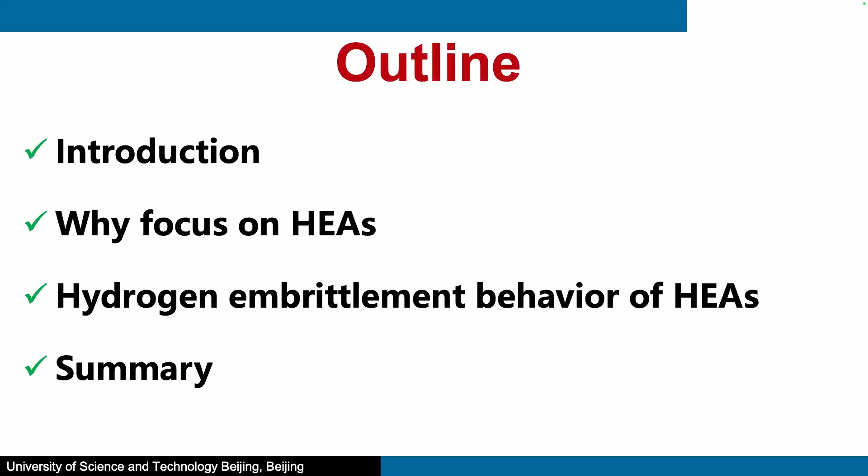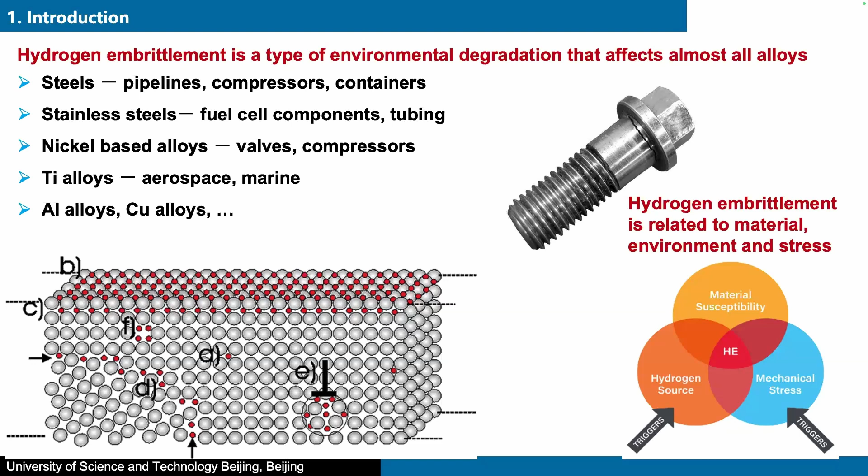As we all know, hydrogen embrittlement is a type of environmental degradation which can affect almost all alloys, such as steels, stainless steels, nickel-based alloys, and all types of alloys can suffer from hydrogen embrittlement.

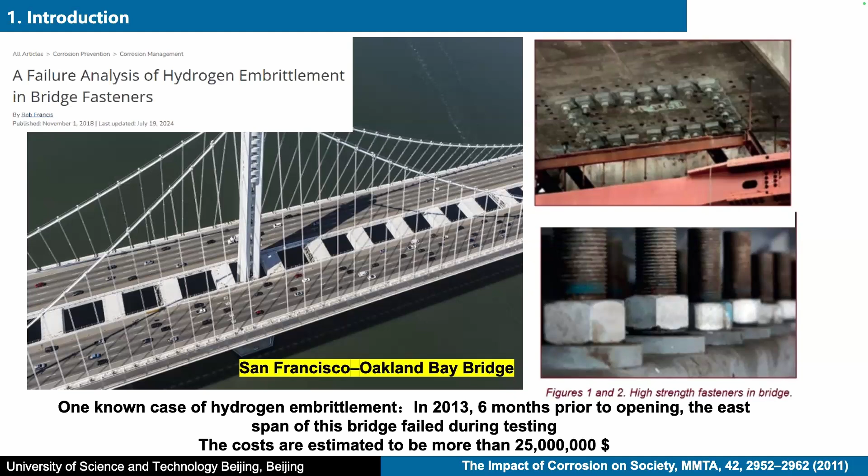This is one very well-known case of hydrogen embrittlement: the San Francisco Oakland Bay Bridge. We did some testing and found high strength fasteners suffer from hydrogen embrittlement, and it also caused a lot of economic losses.

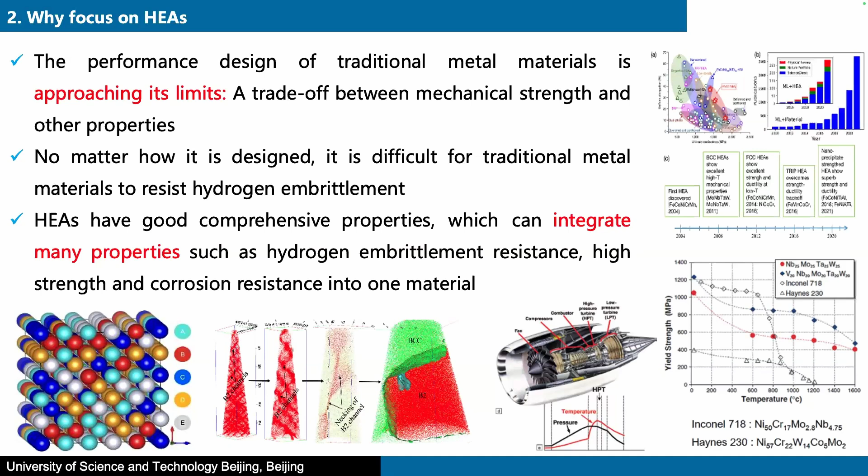So we come to high entropy alloys, because we have many reports about high entropy alloys. They have very good comprehensive properties such as hydrogen embrittlement resistance, high strength, and corrosion resistance. They can integrate many properties together. There are many cases in published work, so we come to this one.

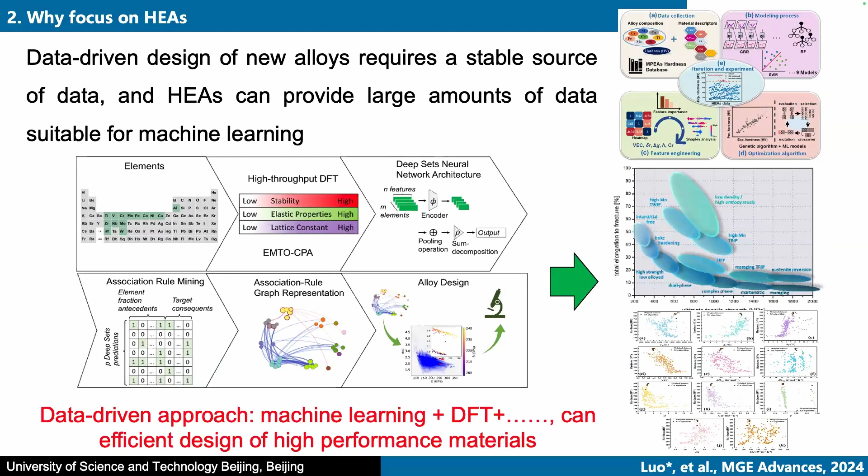Then we can do some machine learning, and also use them to do some DFT calculations, and many calculations can design new high performance materials. There are also many reports, and also come to the next steps.

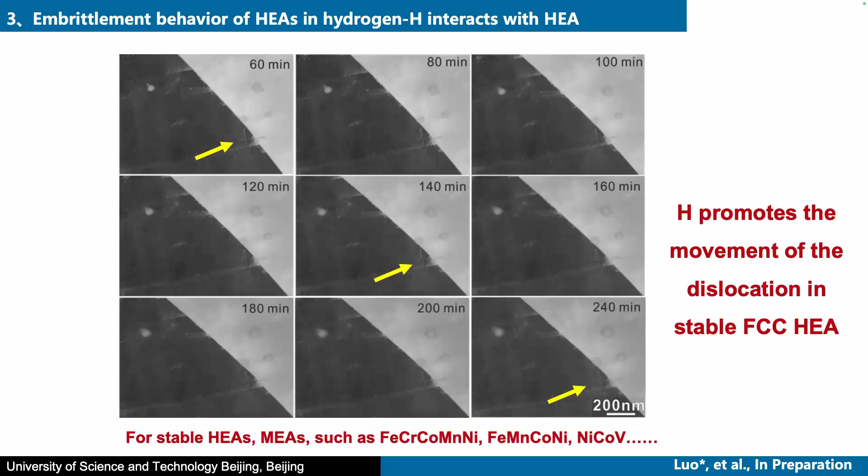If hydrogen just comes into the surface of the high entropy alloys, what can happen? Let's see. There are stable high entropy alloys, of which there are many types. If we charge them with hydrogen and leave them for different times, we found the dislocation can only move from this side to that side, and no other phenomena can be observed.

But if we did similar work observing unstable high entropy alloys, take this for example: it contains two phases, FCC plus HCP. We charged it with hydrogen and observed the similar experiment.

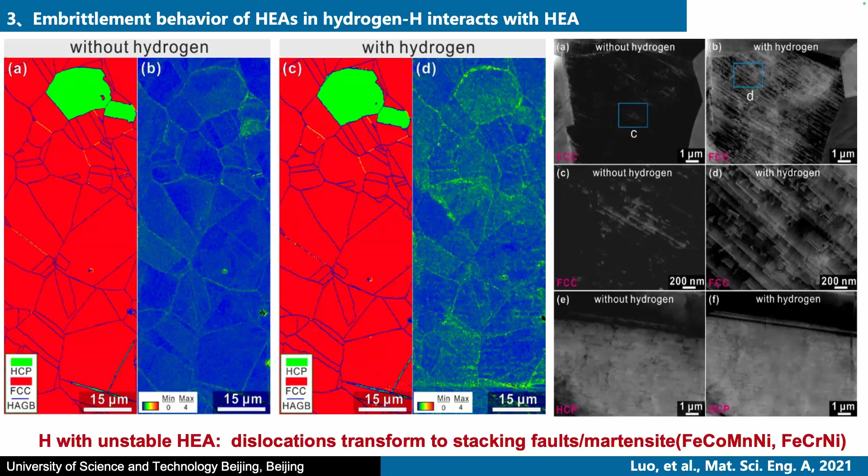We found that for the stable FCC, the free dislocation can transform to martensite at a very small size. But for the HCP, only the dislocation density slightly increases, so it's different.

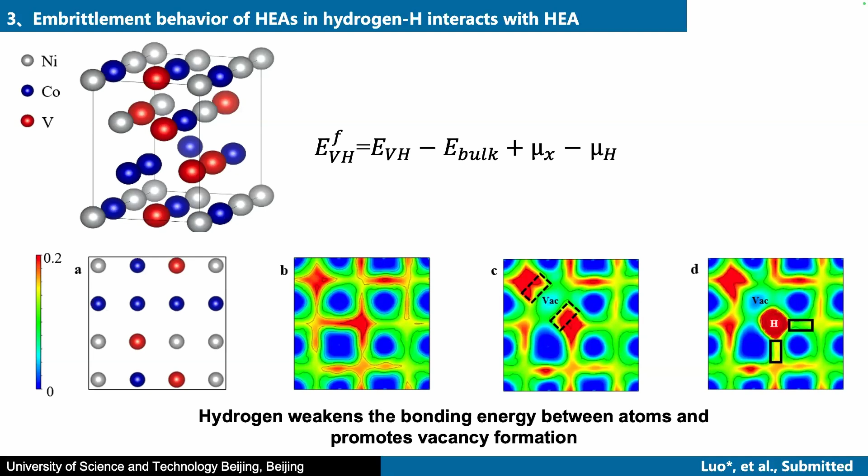Come to the next step. We also did some DFT calculations on how hydrogen can weaken the bonding energy between the atoms, and we found that it can promote vacancy formation. This improves the work.

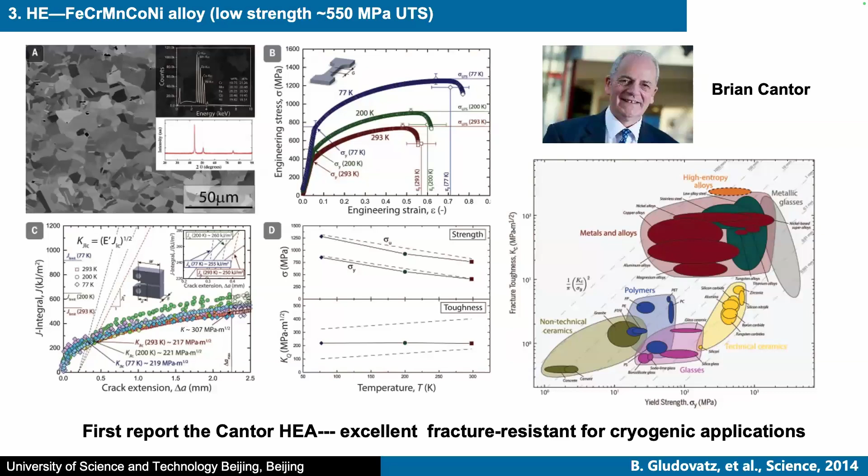Now let's come to some high entropy alloys in hydrogen. First is the Cantor alloy. It is a very famous alloy with excellent fracture resistance in cryogenic applications. This work was published in Science in 2014.

We did experiments to see how this type of alloy can resist hydrogen embrittlement. First, we observed these materials' microstructure and used XRD to find it is very stable FCC, with average grain size about 25 micrometers.

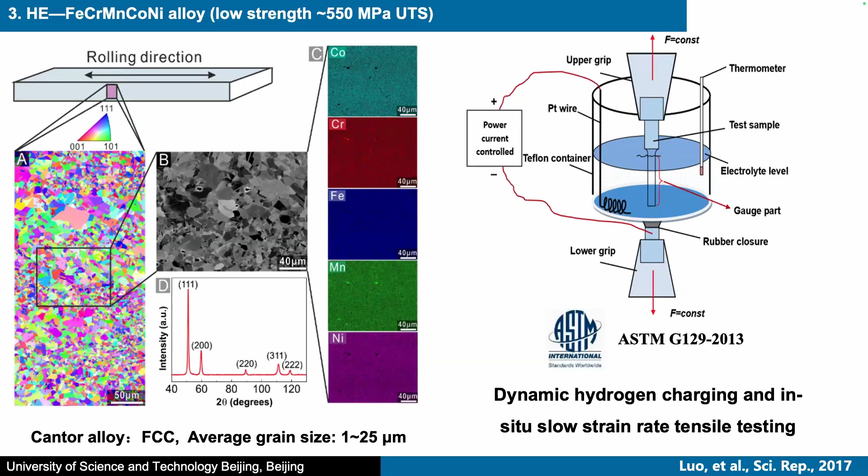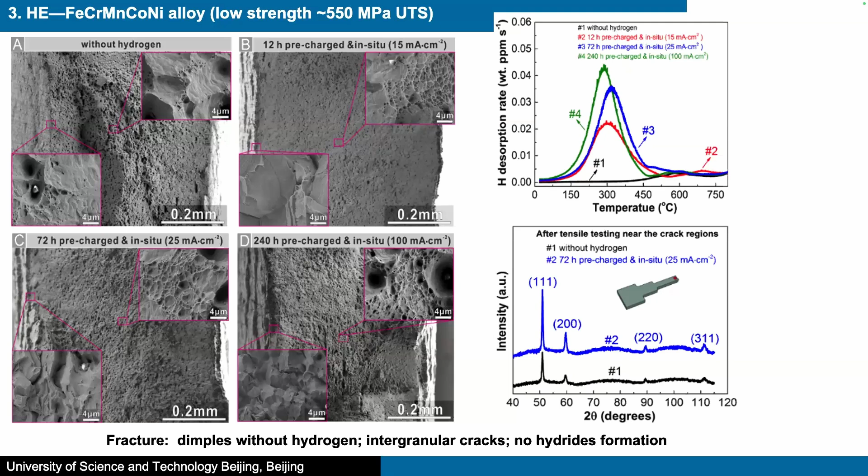This is some of the results, XRD and TDS. We also used ECCI to observe the surface deformation microstructure, and found a lot of hydrogen-enhanced or hydrogen-induced nanotwins during the deformation process.

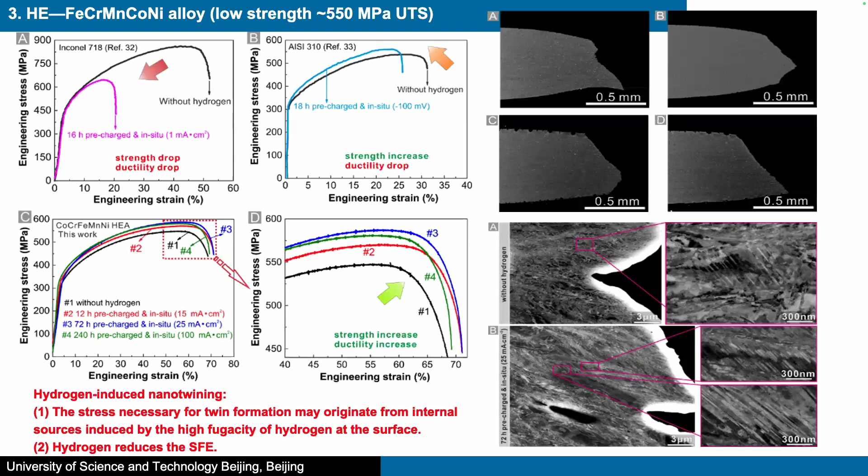This is maybe due to several reasons: first, maybe the stress necessary for twin formation, and also hydrogen can reduce the stacking fault energy of this type of alloy. Then we also did a similar experiment.

The material was tested under liquid nitrogen to prevent cracking. We also found the hydrogen concentration correlates with the density of nanotwins with the hydrogen concentration. They have some relationship between them.

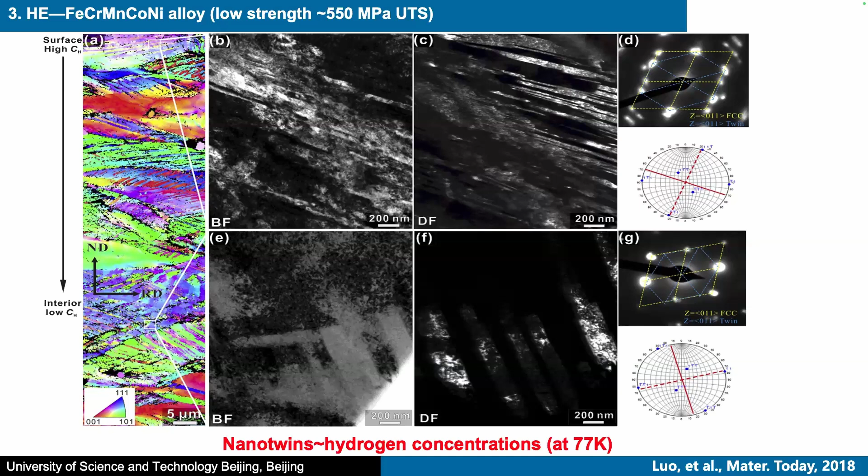Then we come to the moderate strength. It's about 780 megapascal UTS. It is very slightly, it contains two phases. Most of them are FCC and also plus some HCP.

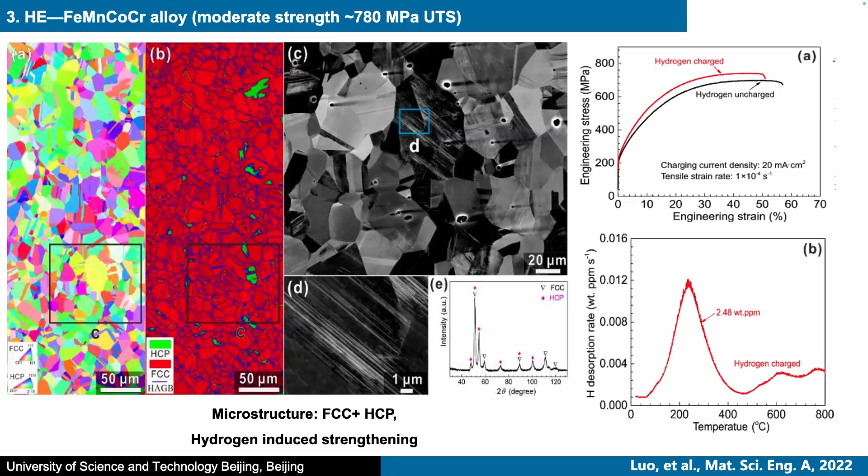We did a similar experiment and found slightly hydrogen enhanced strengthening observed in this type of alloy. We also observed the fracture surface and found the hydrogen affected region was intergranular cracking, and also some transgranular cracking observed in the fracture morphology.

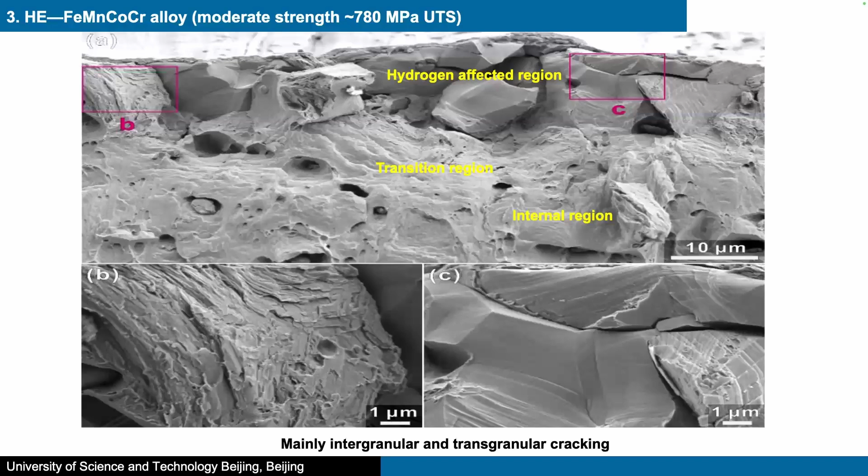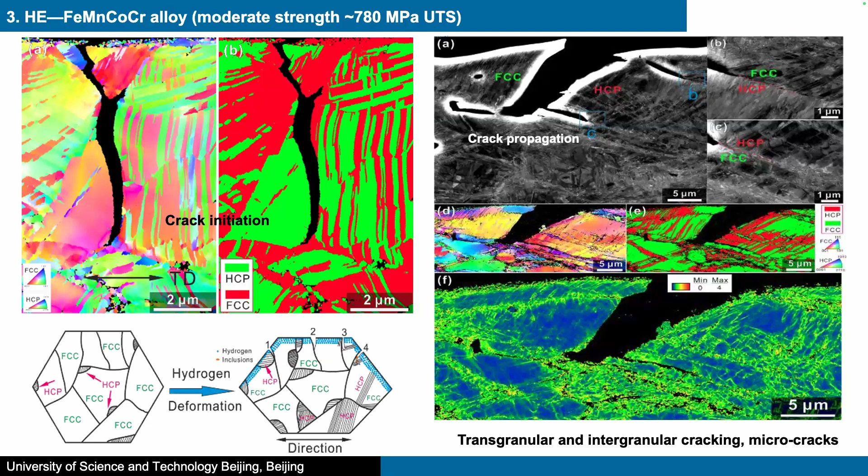We also used EBSD and ECCI to observe the cracking initiation and progression, and found the crack initiation in the HCP phases. We observed transgranular and intergranular cracking, and some micro cracks formed in the microstructure after deformation.

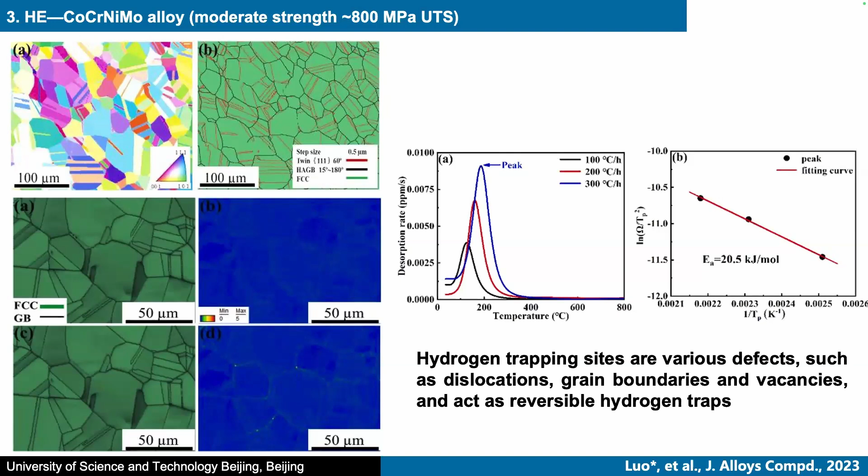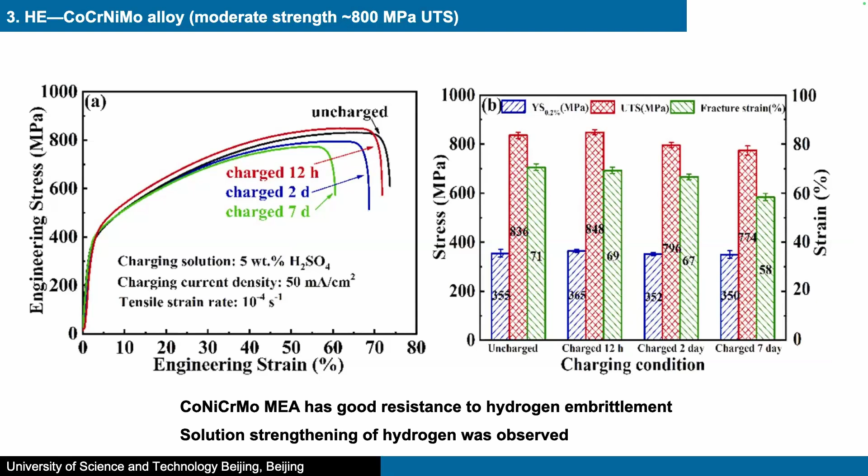This is another type of high entropy alloy. It's also in the moderate strength range. We did similar tests, such as EBSD to observe the microstructure, and TDS to measure the hydrogen trapping sites. We also did tensile tests and found this alloy also has some good resistance to hydrogen embrittlement, and some solution strengthening is observed by hydrogen.

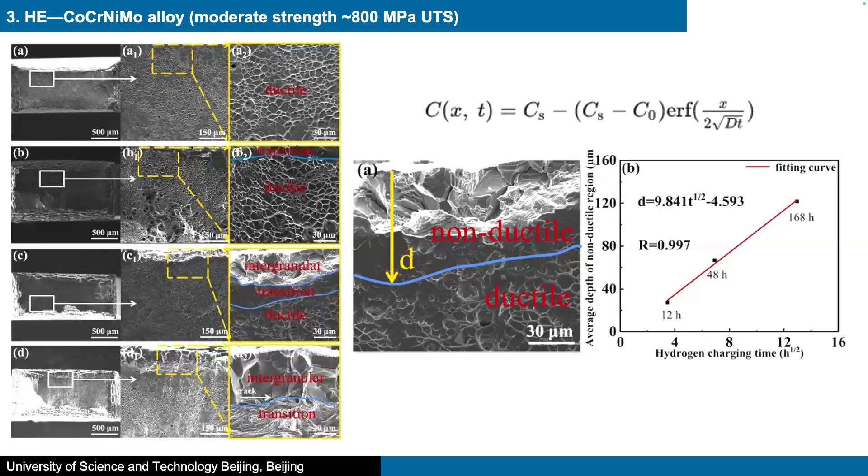This is some of the cracking morphology after the tensile test. We also found the charging time, meaning the different concentration, correlates with the cracking depth. This is the crack inside - we found the initial crack starts along the FCC grain boundaries and also tends to propagate along the grain boundary.

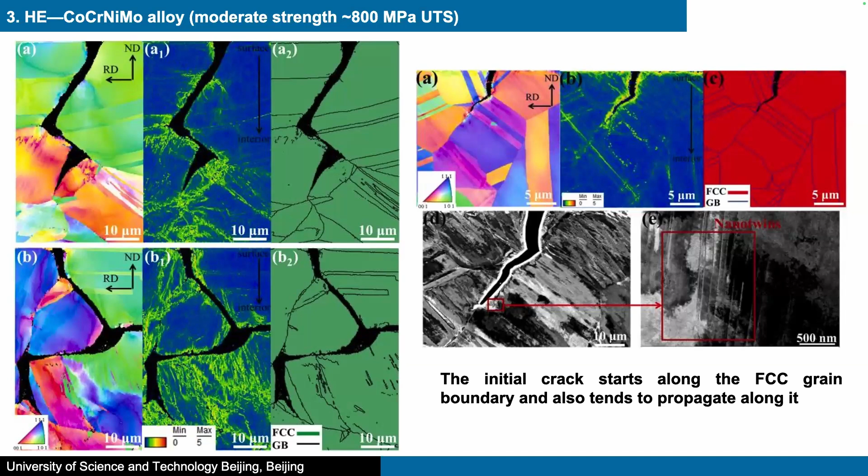Then we come to the high strength alloy. Its UTS is about 1000 megapascal. It's also very stable FCC, no precipitation.

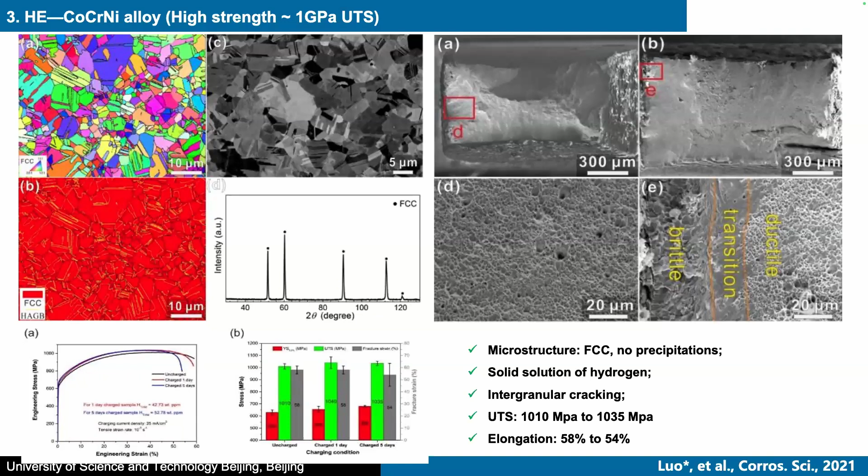We did a similar experiment and found the surface is slightly brittle, and also have transition regions, and it shows ductile sites. We observed the deformation microstructure with different local strains and found some deformation.

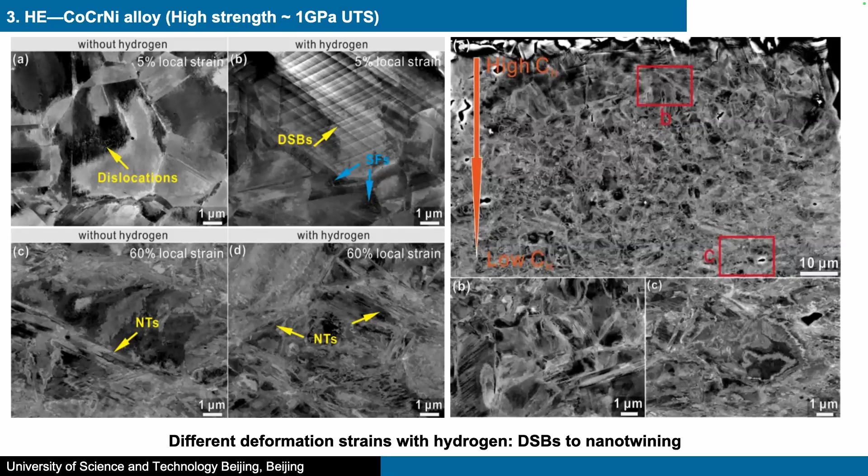This is the EBSD results to observe the cracking initiation and progress. We found the formation of nanotwins can enhance the hydrogen embrittlement behavior, and also hinder the cracking propagation.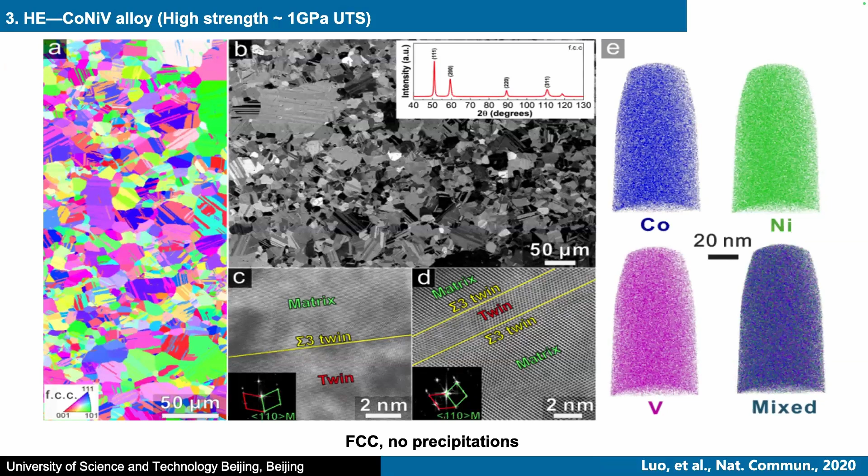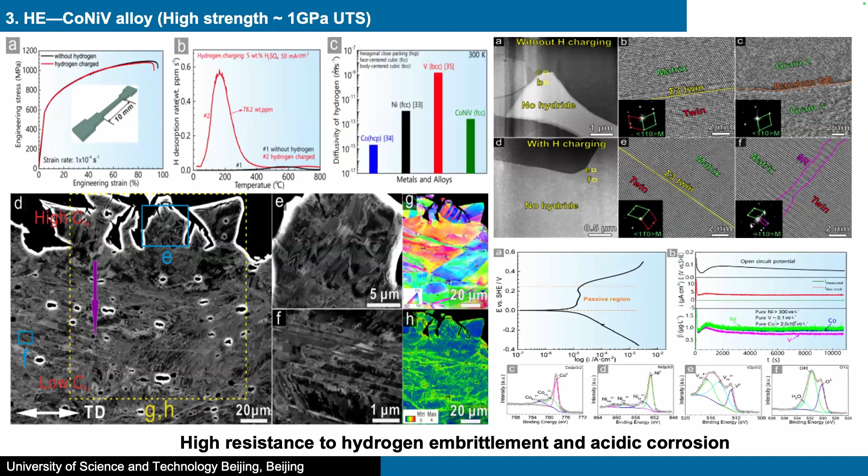We did a similar experiment and also found that the hydrogen embrittlement resistance is very good. Also, if we charge it for a long time, no hydride formation, meaning it's very, very stable under the hydrogen environment. Additionally, this alloy has very good acidic corrosion resistance.

Then we choose another very different type of high entropy alloy. It has very high strength. It is FCC plus some precipitations.

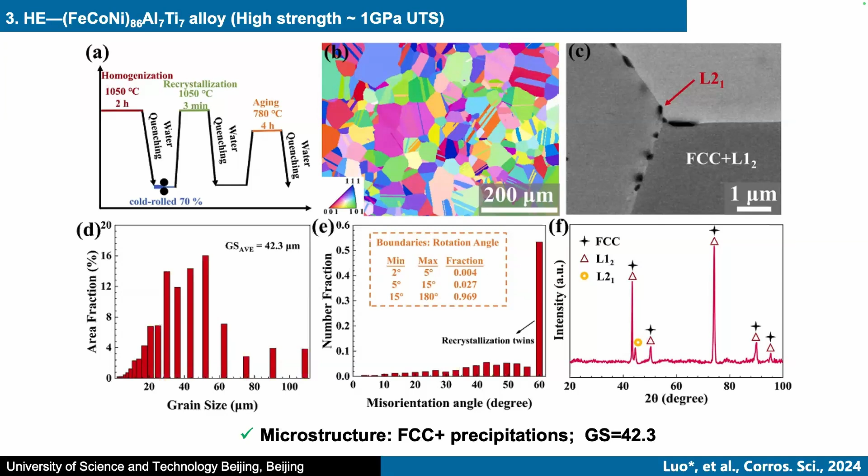This alloy has a UTS of nearly 1020 megapascal, and we also charged it with hydrogen. We found the elongation - if we charge more hydrogen into the sample, the elongation will be decreased a lot. It has about 16.

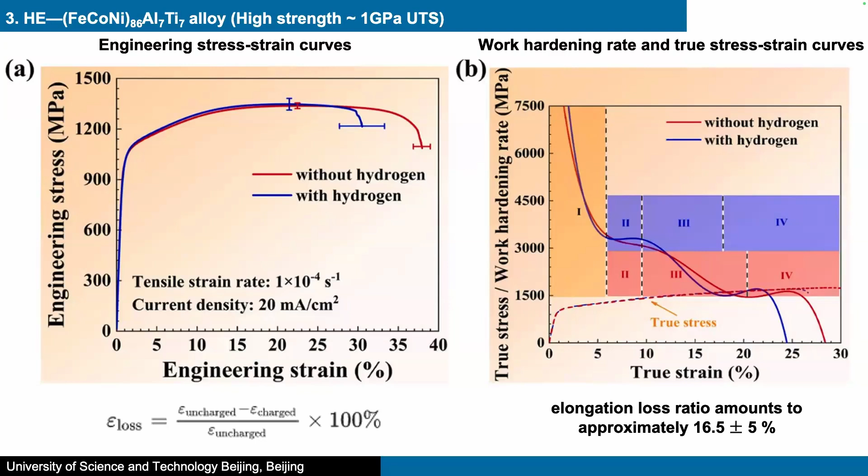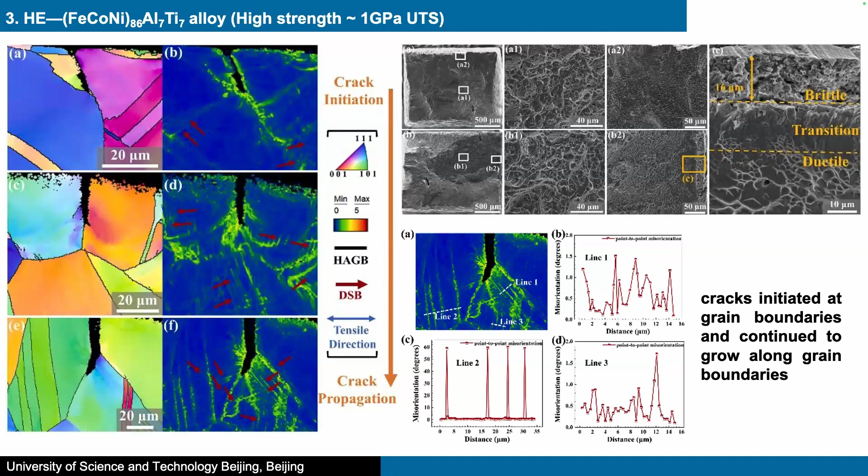We also used EBSD and ECCI to observe the cracking performance, and found very similar results to the other high entropy alloys. We also used ECCI to observe the strain deformation.

It's about 10% deformation, and we use samples without hydrogen. We found that these alloys don't have nanotwins observed in this type, also no microbands.

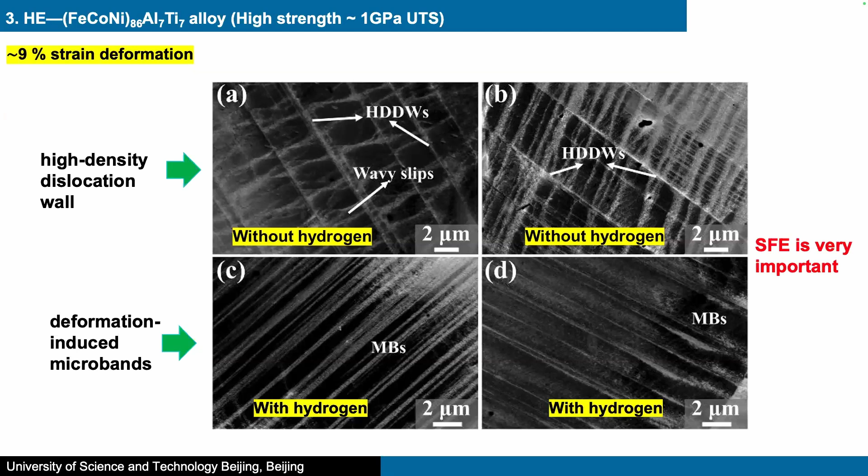So we can conclude that stacking fault energy in high entropy alloys is very, very important. We also come to why intergranular cracking is observed in high entropy alloys. There are many reasons, such as stress concentration, hydrogen segregated into the grain boundaries, and others.

But how is the hydrogen embrittlement mechanism in high entropy alloys? Sometimes we think HELP, HEDE, and hydrogen assisted vacancies also exist. And the very important reason maybe is hydrogen enhanced twinning in high entropy alloys.

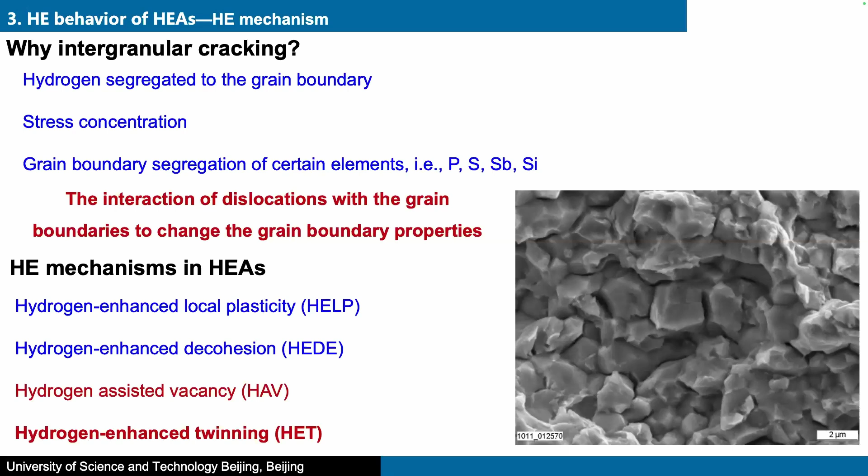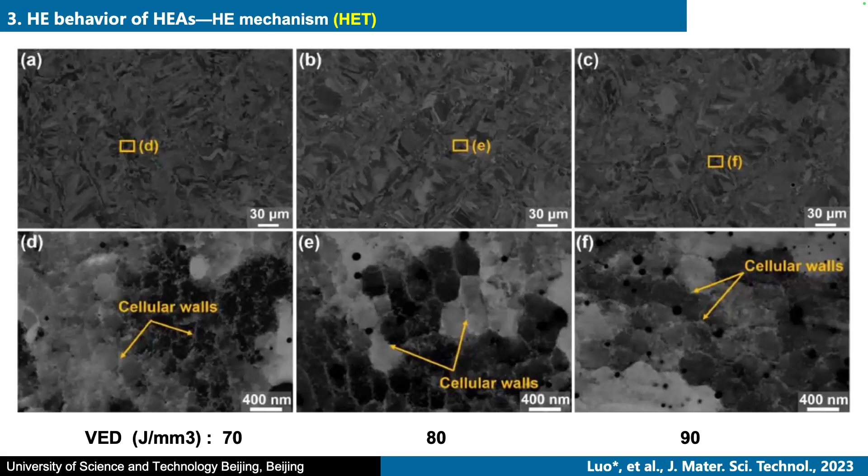So to confirm our results, we did another experiment. We used different additive manufacturing to introduce different types of nanotwins, using different additive manufacturing processes. We found that if we control the density of nanotwins, we can achieve different hydrogen resistance in this type of alloy.

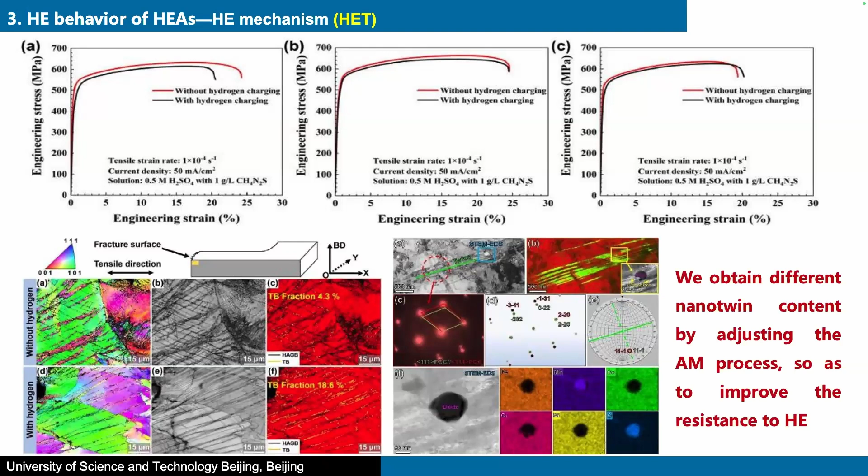You see, this is hydrogen sensitive. This is also very, very good. So we think hydrogen enhanced nanotwin formation is very important in high entropy alloys.

Then we come to the summary. We have obtained some results.